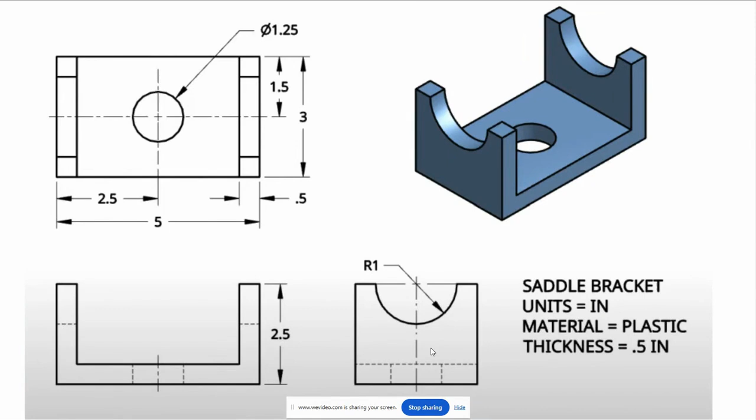In this project, we will be creating the saddle bracket. Our basic strategy is going to be to sketch out this U shape, dimension it, and then extrude it across by 3 inches. Then we'll add a little circle in the middle, make sure it's centered, rotate it toward the backside, and add a little half circle hole. So let's go ahead and get started.

We're going to go into OnShape, hit the little Insert tab on the bottom left, and add Create Part Studio. We're going to rename this Saddle Bracket and hit Enter. Now we're going to start our sketch.

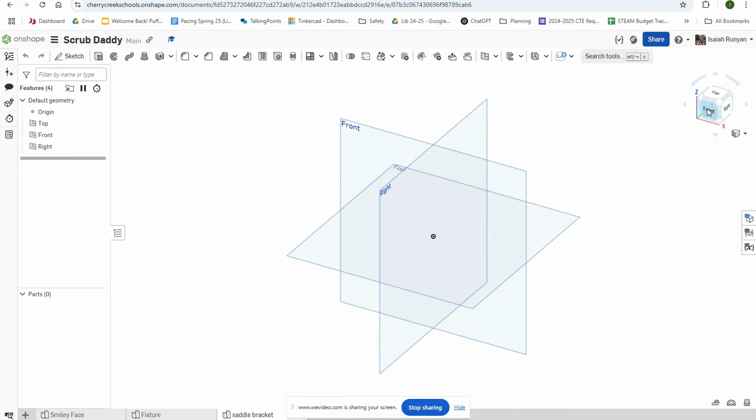We're going to double click on this little cube here and double click on Front. We're going to click on Sketch, and then choose the front plane here. We're going to click on the line tool and start straight above this little center point.

So you go up here, straight down, straight across, straight up. Make sure this is centered here. Then across, down, across, up, across.

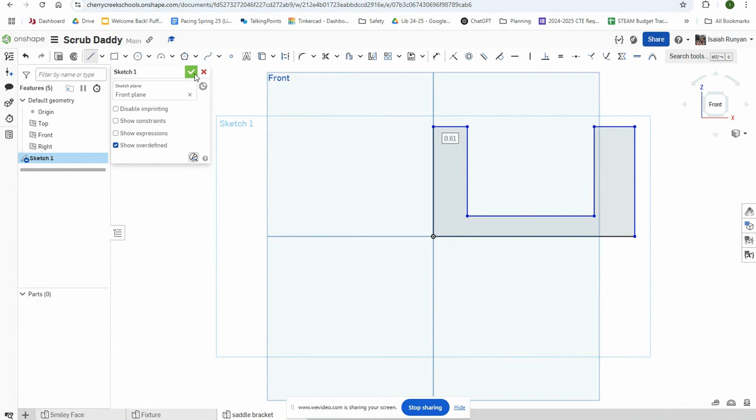Then we are going to add in our dimensions. So we're going to click the dimension tool. If you look at the height of it, it should be 2.5. And then the bottom across should be 5 inches. And then the width of this thing should be 0.5.

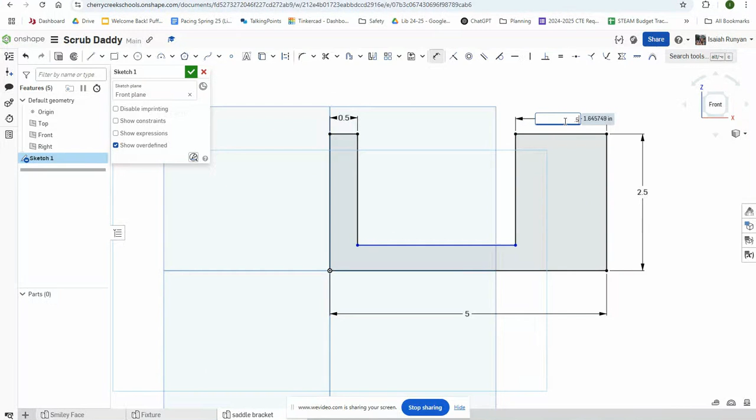So we're going to change this to 0.5, this to 0.5, and this to 0.5. We're going to hit the green checkbox.

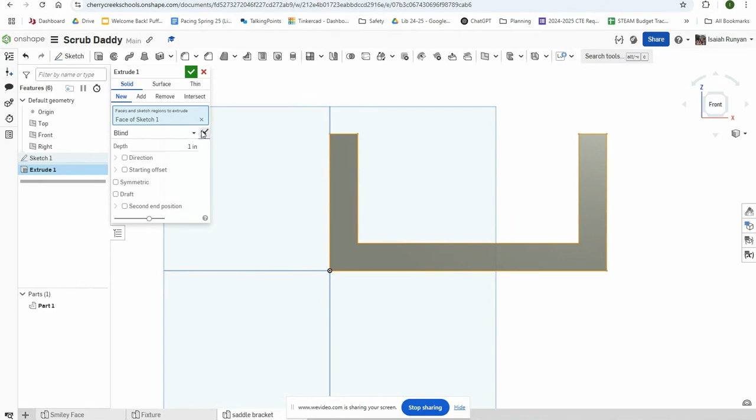Next, we're going to click on our extrude. We're going to choose extrude, click the sketch we just did, and extrude this thing by 3 inches. We're going to hit the green checkbox, okay?

So now we've got our extrude. Now we're going to add in this circle here. So we're going to come back and rotate. I'm going to double click on top right here, and I'm going to choose to sketch.

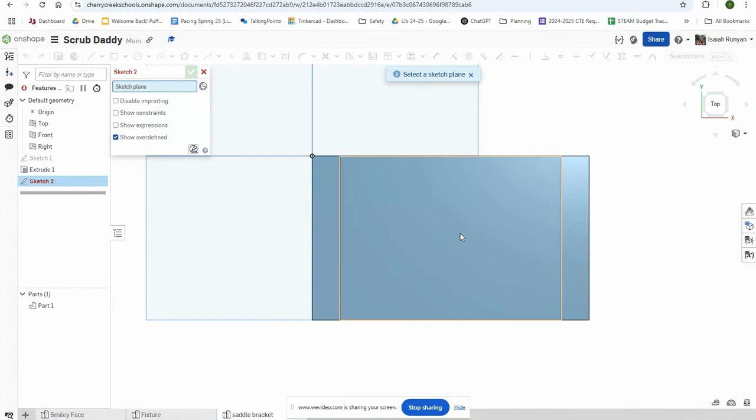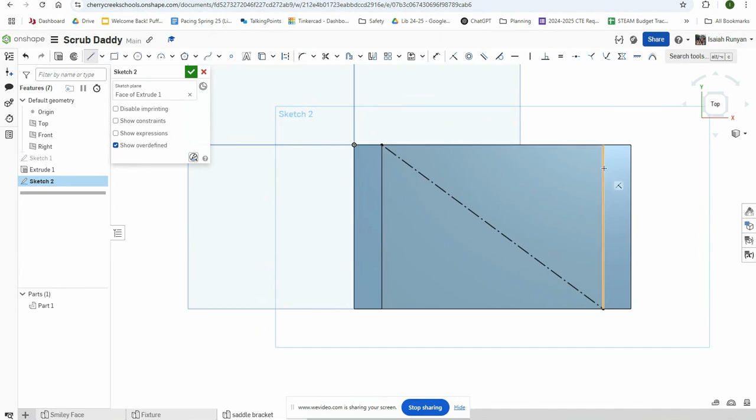I'm going to click on this little middle square right here, and I'm going to create what's called a construction line. So I'm going to click on construction and choose the line tool. I'm going to put an X on this guy, going from this corner to this corner. Then I'll right click, hit escape line, and do another line, making sure I'm squared up here, from this corner to this corner, making sure that's a construction line too.

And then I am going to add a circle right where those two lines meet. This will ensure that my circle is perfectly in the center — that's a little geometry trick for you. So I'm going to click here, and then set the diameter to 1.25. Hit enter.

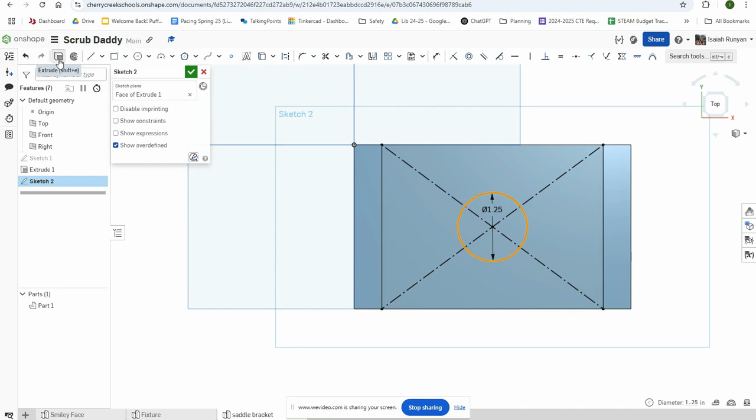Last thing, I'm going to click on the circle and make sure that is not a construction line — you want a solid line for that one. And then we're going to grab that circle and extrude it. But this time, instead of adding new, we're going to change it to solid and hit remove.

Click on the circle, and we're going to pull it all the way through. It'll probably go through on its own, and we hit the green checkbox. Okay, now we have that circle in there — it's the right size, and it's in the middle.

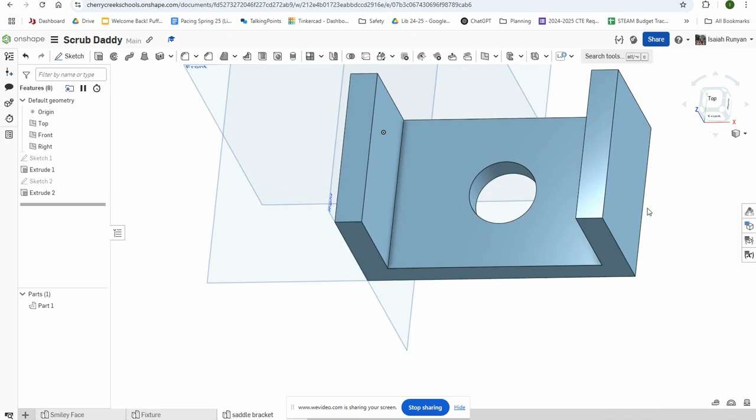Last thing we need to do is rotate around to the right side. So you can right click and do, where's the little trick — you can hit view normal to. Square it up. I don't like that, I'm going to double click on right instead. There we go, so I double click on right.

Now I'm going to add that half circle there from our drawing. We're going to add this little half circle here with a radius of 1. So we're going to do sketch, select this plane here, and do a little circle.

We're going to go to the middle. If you hover over here, you'll see the little yellow square telling you you're in the middle. We'll do that, go here. And here's where you guys have to be careful, because the instructions say a radius of 1, but your default for Onshape is to do the diameter. So for those of you who are really good at math, you know the radius is half of the diameter — so you have to double it.

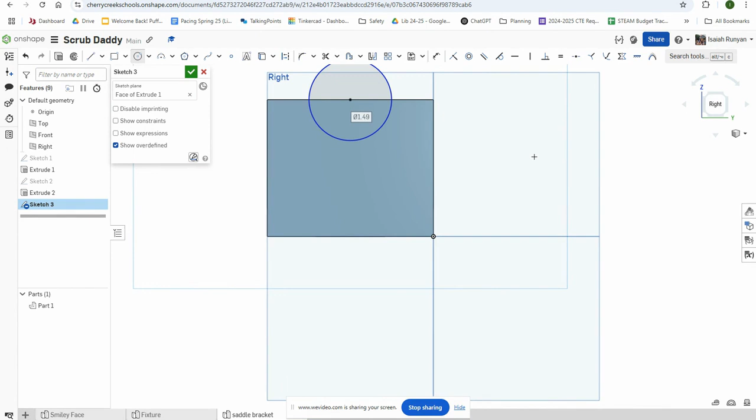Instead of doing a 1 diameter, we're going to change it to 2. And then we're going to click on the extrude. It's an add, so we're going to change it to remove, and pull it all the way through, then hit the green checkbox to save.

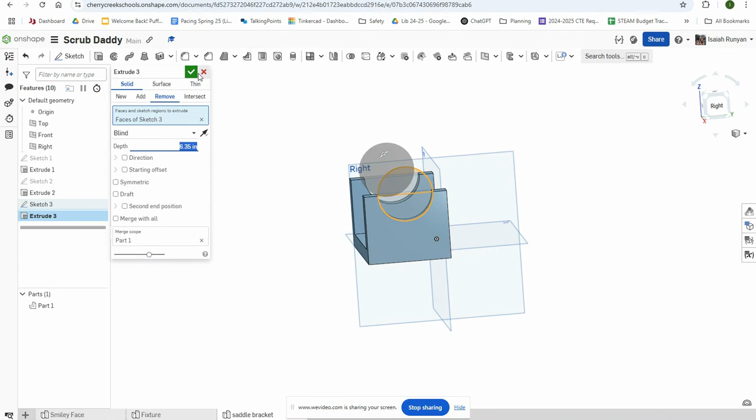Okay, so now if we do that, our part's pretty much done. All we got to do is right click here, go to properties, choose a property for it. This one is plastic — sorry, that's the wrong one. Right click, and we're going to go to assign material. Click, type in here, go to plastic.

We'll just do ABS since it's right at the top, okay? And then we go plastic, hit the checkbox. Now we can check on this little balance here, click on our part. And now if we 3D printed this object, we would know that it would weigh about 0.43.

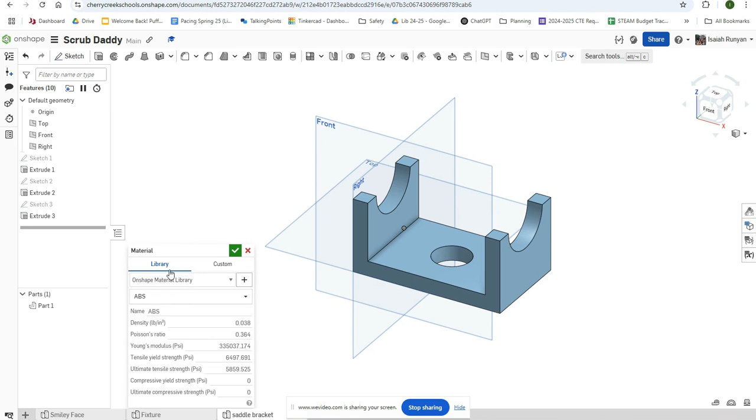If your number is way off of that, you know you probably did something wrong. And as usual, if you guys want to get fancy with this thing, you can right click and edit its appearance and give it a cool color like orange. So there you go. Good luck.